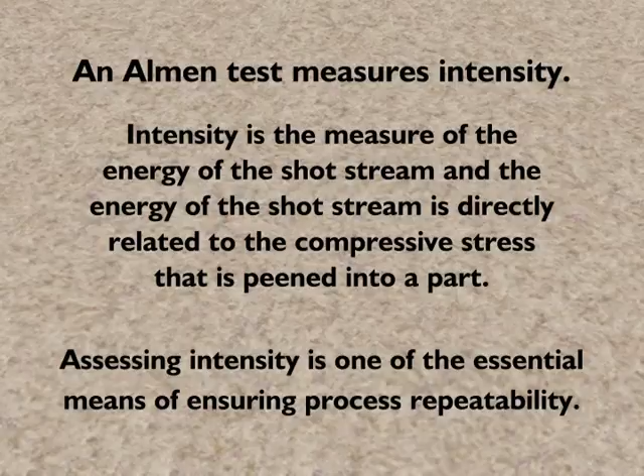An Almen test is a crucial component of a controlled shot peening process because it measures intensity. Intensity is the measure of the energy of the shot stream, and the energy of the shot stream is directly related to the compressive stress that is peened into a part. Therefore, assessing intensity is one of the essential means of ensuring process repeatability.

Almen gauges, strips, and holders from Electronics Incorporated are the worldwide industry-standard tools for measuring intensity through Almen tests.

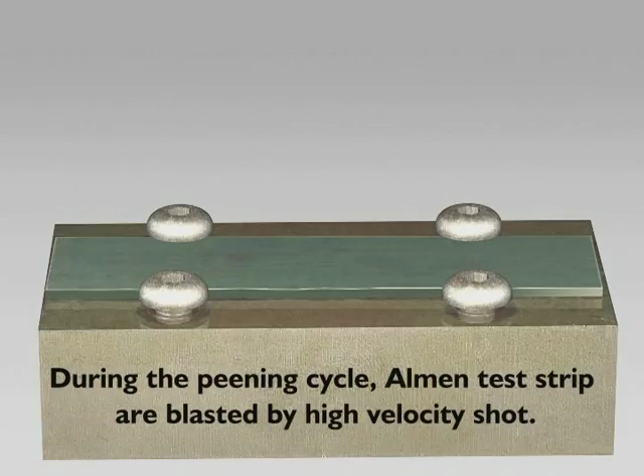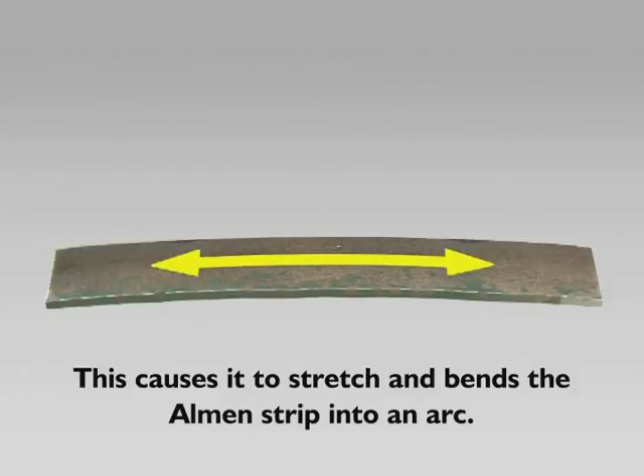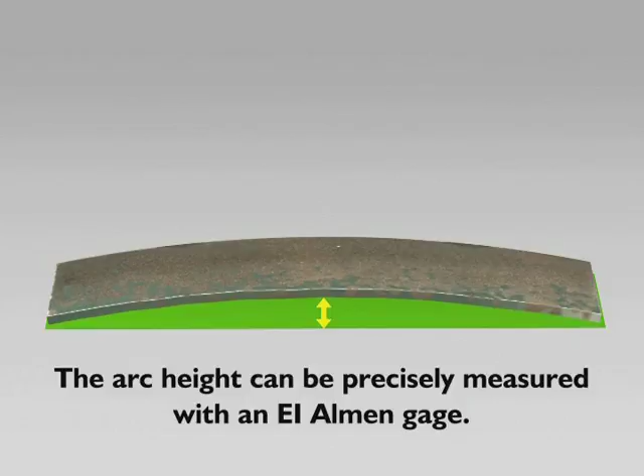During a shot peening cycle, Almen test strips are blasted by high-velocity shot. This compresses the surface of the Almen strip and causes it to stretch, thereby bending the Almen strip into an arc. The height of the arc is directly related to the intensity of the shot stream. The arc height can be precisely measured with an Electronics Incorporated Almen gauge.

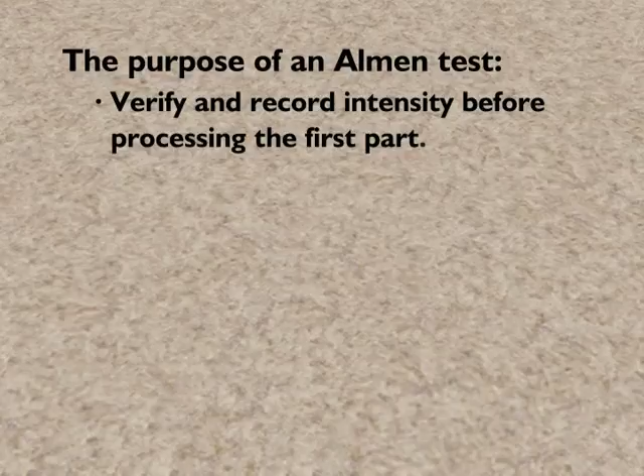The purpose of an Almen test is to verify and record intensity before processing the first part. This ensures that the shot peening machine is set up and running according to the approved design parameters so that possible damage to valuable parts is prevented.

After the production lot of parts has been processed, the Almen test is repeated to ensure processing parameters have not changed. For long production runs, Almen tests should be performed throughout the processing as required.

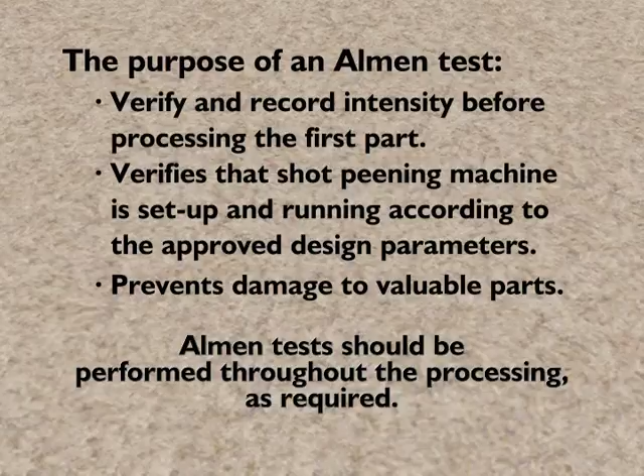Let's go through the steps necessary to conduct an Almen test. The first step is to mount the Almen holder on a scrap part or fixture.

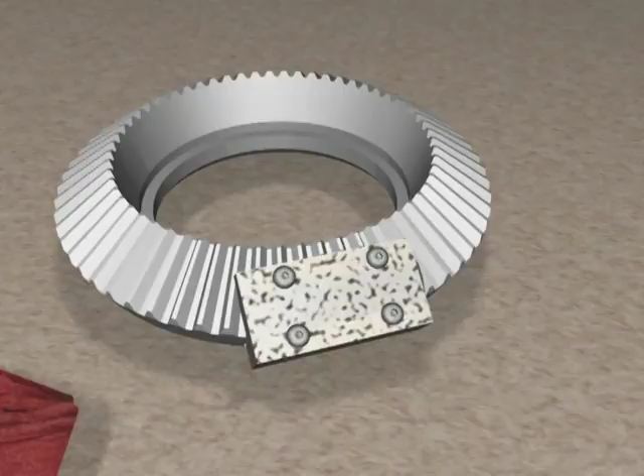Almen holders should be mounted in locations where verification of impact energy is crucial. Place the scrap part or fixture on the part holder on the shot peening machine's table.

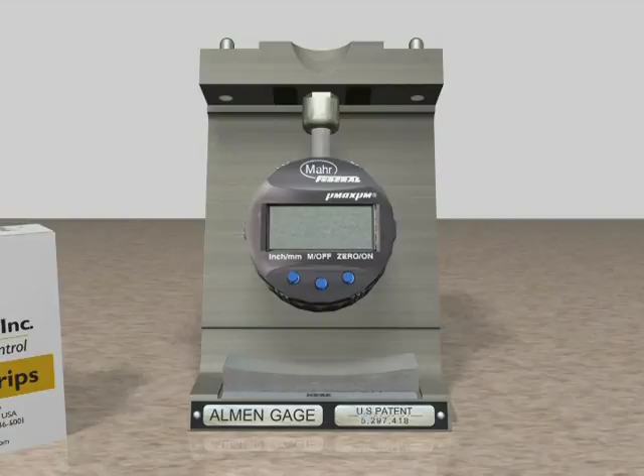Next, we need to check the Almen strip for flatness or pre-bow on the Almen gauge. To do this, we need to zero the gauge. Press the 0/on button to turn on the gauge.

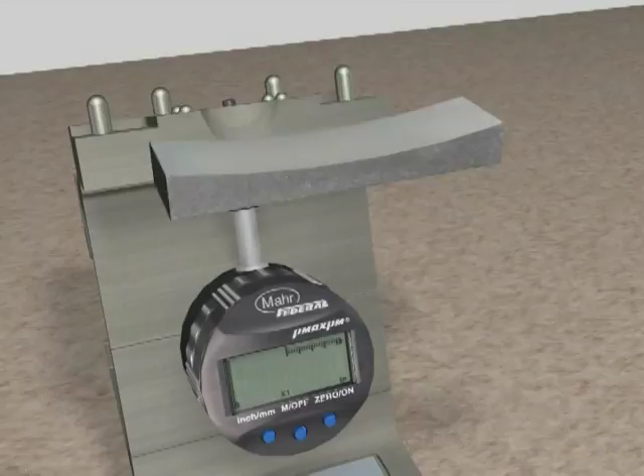Place the master check block flat side down in the inspection position and make sure it rests against the two back pins and is centered between the two side pins. Then press the 0/on button again to zero the gauge.

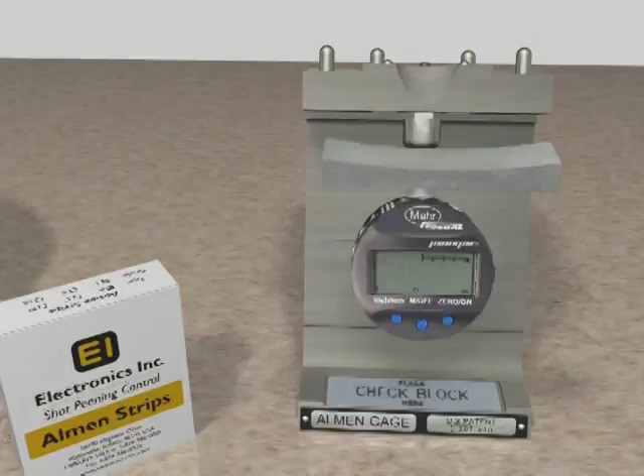Remove the master check block and put it back on the magnetic mount at the bottom of the gauge. Now we're ready to check for flatness or pre-bow.

Place the strip onto the gauge and note the indicator reading. Measure both sides of the strip and make sure both are within the accepted tolerance band.

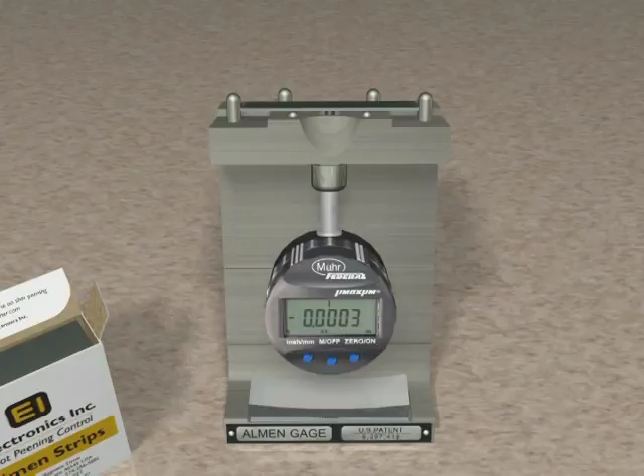Note that for aerospace applications, the most pre-bow allowed for either side is 0.0005 of an inch. EI's A1S strip meets this requirement.

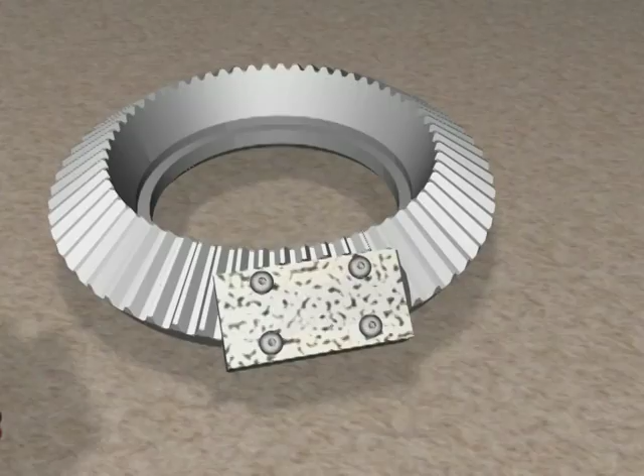Make sure the holder's surface is clean, because if foreign material, such as media, gets trapped under the Almen test strip, it can cause it to bend slightly and throw off the arc height reading.

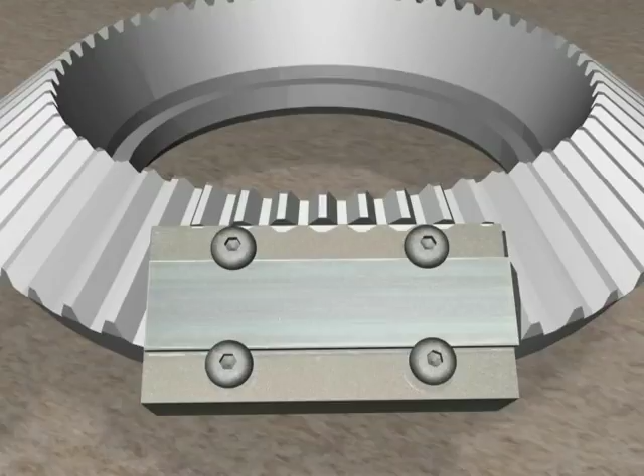Center the strip on the Almen holder. Tighten the 4 screws and place the holder in a suitable fixture in accordance with drawing requirements.

Run a process cycle.

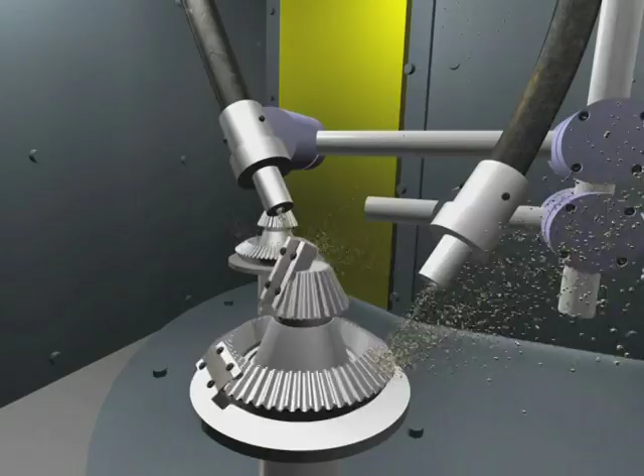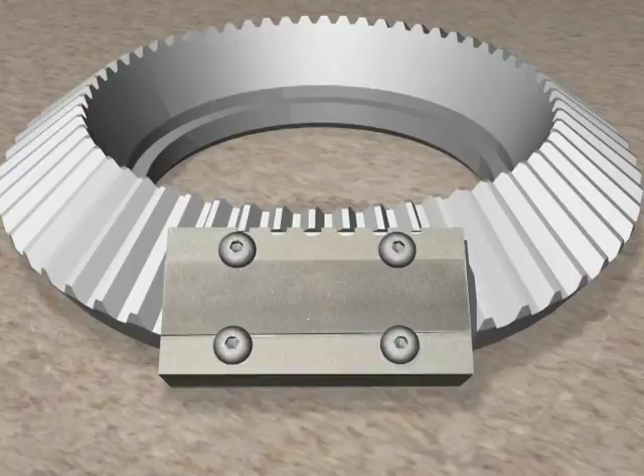When the process is finished, remove the fixtures and take them to the gauge table. Loosen the Almen holder's 4 screws and remove the Almen test strip.

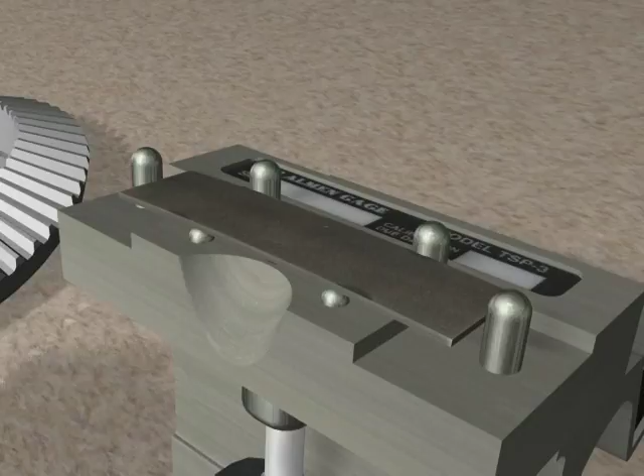The next step is to measure the arc height using the Electronics Incorporated Almen gauge. To measure the arc height of an Almen strip, place the peened Almen test strip in the inspection position with the peen side up. See that it rests against the 2 back pins and is centered between the 2 side pins.

The patented magnetic grip securely holds the strip for accurate measurement, so no spring or finger holding will corrupt the reading accuracy. Since all of the holding force is concentrated at the support balls, absolutely no strip distortion can occur. The foolproof end stops assure placement within the intended measuring point on the strip.

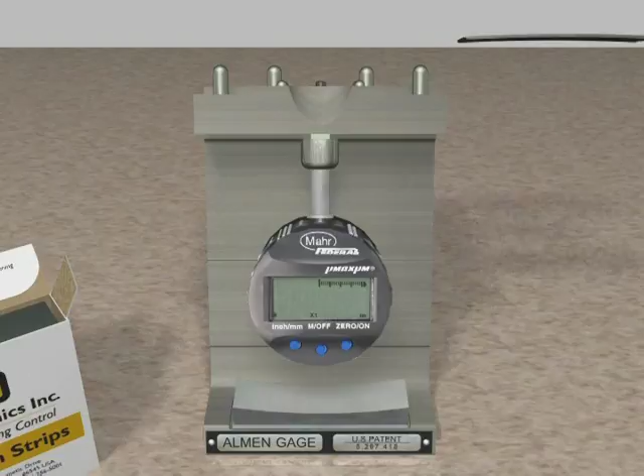Record the arc height and exposure time. Confirm that you are in compliance with intensity accept-reject criteria for your application. If the results are not acceptable, check your machine parameters and shot flow.

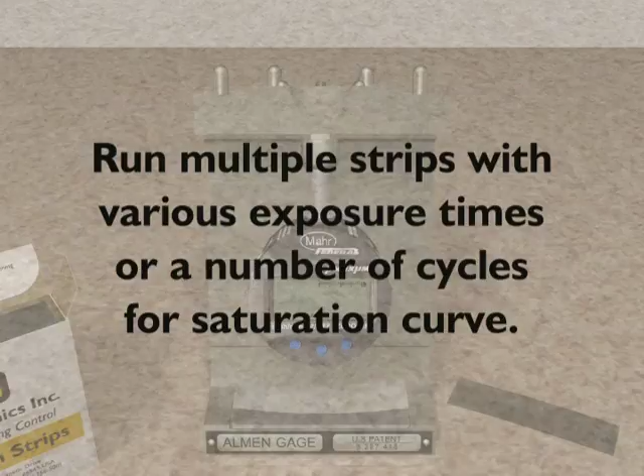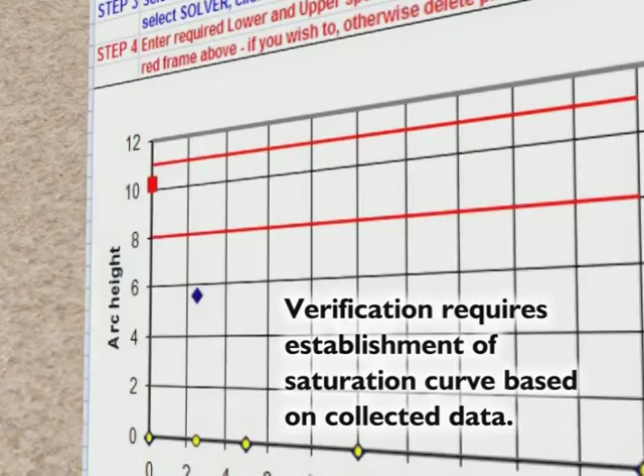If a saturation curve is required, run multiple strips with various exposure times or a number of cycles. Initial verification of a process development requires the establishment of a saturation curve based on the collected Almen arc data.

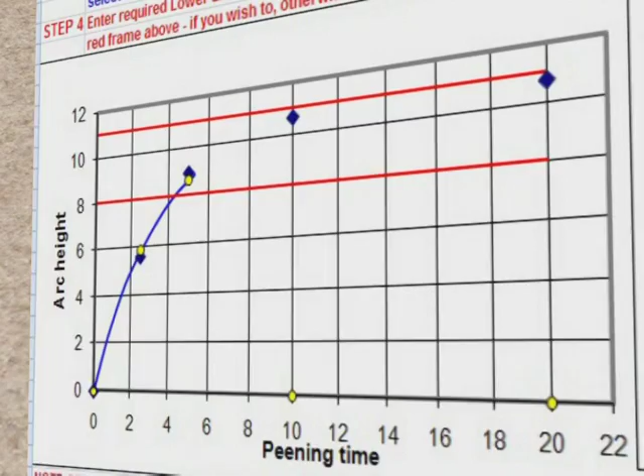Electronics Incorporated has made available a free Almen Saturation Curve Solver program developed by Dr. David Kirk. The Curve Solver program will automatically determine the Almen intensity and draw a graph for you.

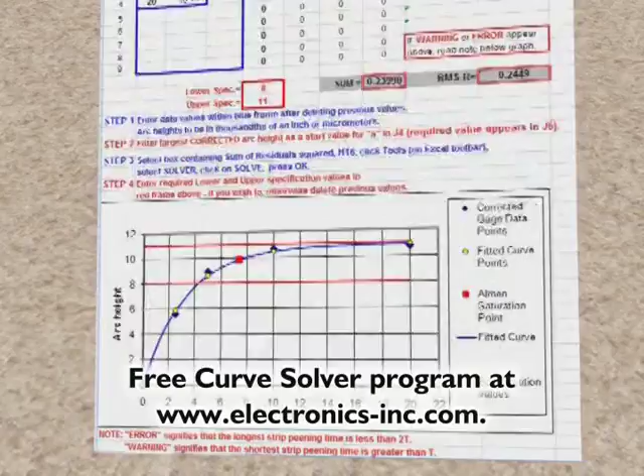To get the Curve Solver program, go to www.electronics-inc.com. When the Almen test is complete, press the M/off button for 3 seconds to turn off the gauge.

Before placing the gauge back into the case, make sure the holder's surface is clean. No other maintenance is necessary. However, the gauge should be calibrated annually to assure proper performance.

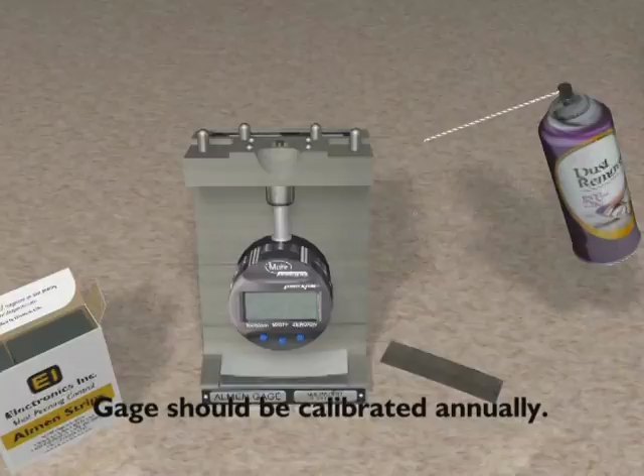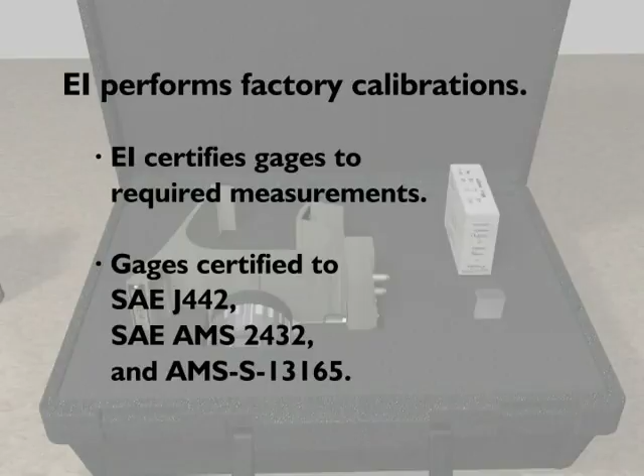Electronics Incorporated can factory calibrate your gauge and certify all the required measurements. EI can certify gauges to SAE J442, SAE AMS 2432, and AMS S 13165. Now is a good time to check your supply of Almen strips.

Electronics Incorporated manufactures and distributes certified Almen strips. EI oversees and is responsible for every aspect of the manufacturing process so that EI strips are of consistent quality, give repeatable results, and are shipped promptly.

EI can provide strips to any specification, from standard mill specifications to rigid aerospace specs, and EI strips will conform to width, height, thickness, flatness, and hardness requirements.

Electronics Incorporated strips are packaged in the well-known white, yellow, and black boxes with the great information on the label. Our Almen A, C, or N strips in grades 1, 2, and 1S are pre-qualified and ready to use. The inspection information on the back of the box documents EI's quality control process.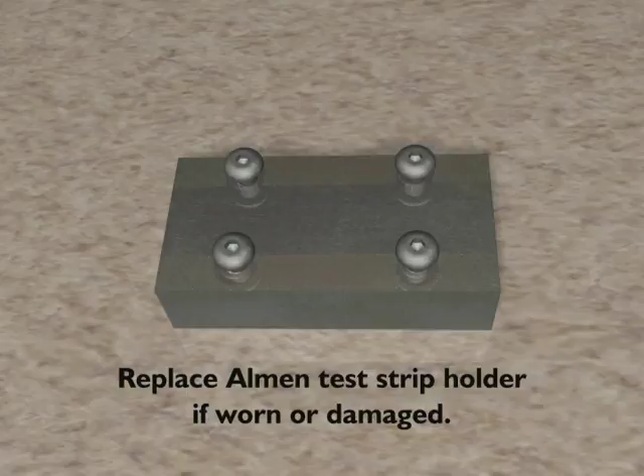Also, check the Almen strip holder and screws. If they are worn or damaged, they should be replaced because they can distort the arc of the strip during peening. Electronics Incorporated manufactures test strip holders in 2 designs, non-threaded or threaded.

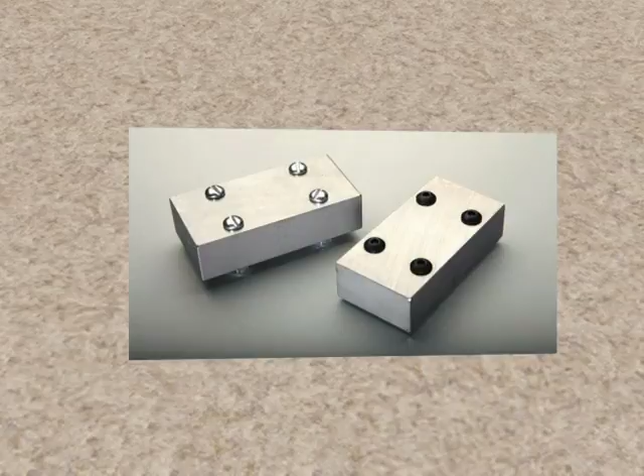Both versions meet industry specifications. Refer to the owner's instruction manual provided in the case for complete information on the use and care of the EI Almen Gage, check block, and Almen strip holder.

In addition to Electronics Incorporated's Almen products and calibration services, EI offers on-site training programs and workshops that cover all aspects of the shot peening process, including how to conduct an Almen test. Contact Electronics Incorporated for more information on these training programs and EI products.